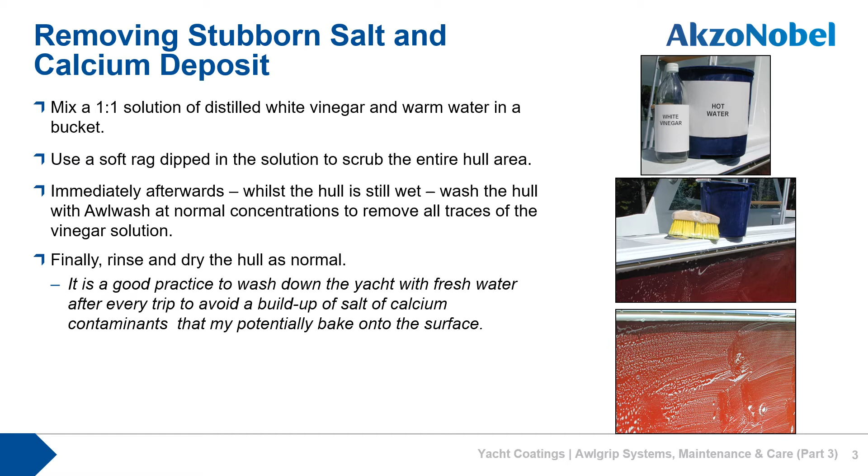Finally, using a pH neutral washing soap such as Awlwash to clean the surface, thoroughly rinsing again and drying. Best practice is always to try and remove any salt residue or dirty water after use straight away with a rinse down. Once you've washed away any contamination or dirt, we always recommend drying the surface.

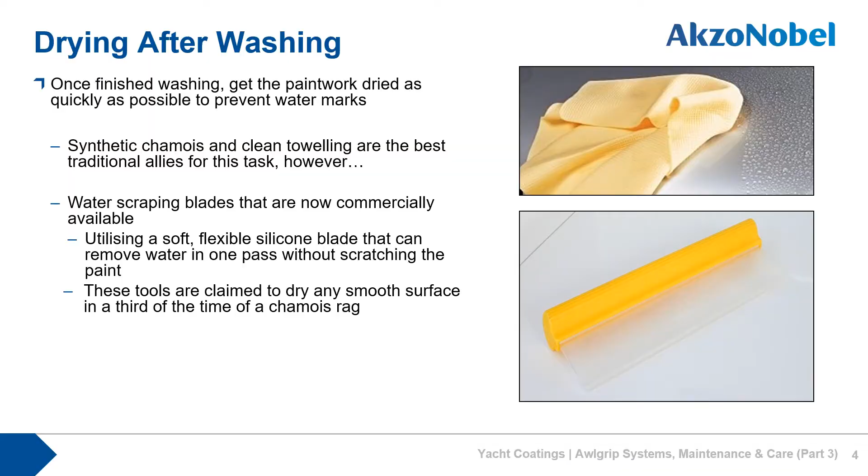As we previously mentioned in session 2 on the water spotting section, the water is actually the carrier of the contaminants that can then etch or bleach the surface of your paint. So removing the water will remove the carrier, in turn improving the finish and reducing the risk of any marking. In this section, we talk about polishing and the aftercare maintenance of your top coats.

Okay, so let's talk about polishing polyurethane top coats. Polishing or buffing or cutting, there are many different terminologies within our industry and what this actually means. For the purpose of this slide, we're talking about using abrasive pads or cleaning compounds with aggregates in them that are used with a mop to bring back the luster or gloss of a top coat. This could either be due to age or even when you do a repair.

So let's talk about Awlgrip top coats. Remember, Awlgrip is a brand name, so we need to consider there are different product names within that brand. So when we say it has Awlgrip on there, what does it actually have? Does it have the polyester polyurethane, the Awlgrip G-line top coat, or does it have the acrylic polyurethane, the Awlcraft product, or does it have HDT, which has a unique combination of both the benefits of a polyester and an acrylic? So you've heard me talk about a polyester and an acrylic.

What does that mean? Well, with our polyester polyurethane, our G-line product, this offers a very resistant and hard surface. And in the curing process, you have a resinous rich layer that forms on top of the pigment. And this is depicted by the diagrams on the right hand side of the page. So let's look what happens if we damage this. Well, this means we expose the pigment, which is depicted by the red dots.

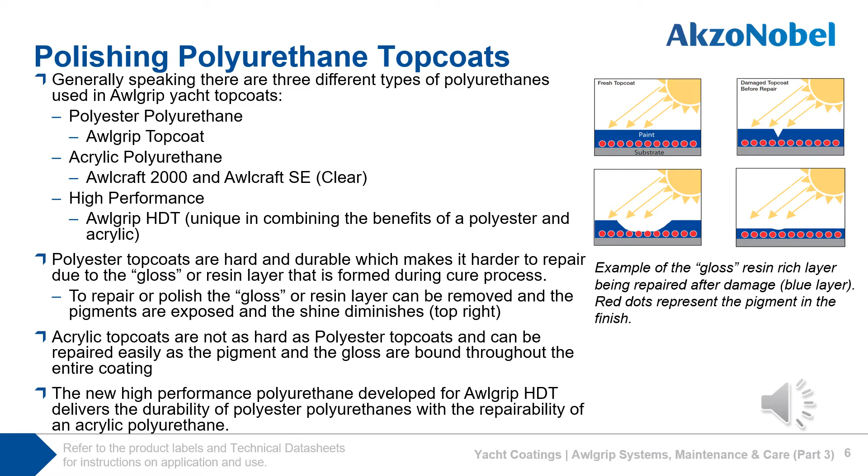Before we polish or buff the surface, we need to consider the type of paint that we're dealing with. As previously mentioned, with a polyurethane, it's possible to damage the resin-rich layer on top of the pigments, exposing the pigment in the long term and causing downgloss. With this consideration, we need to understand the types of materials or compounds we're using. Are they too abrasive? Are the pads too abrasive? Are we using clean and well cared for materials and equipment?

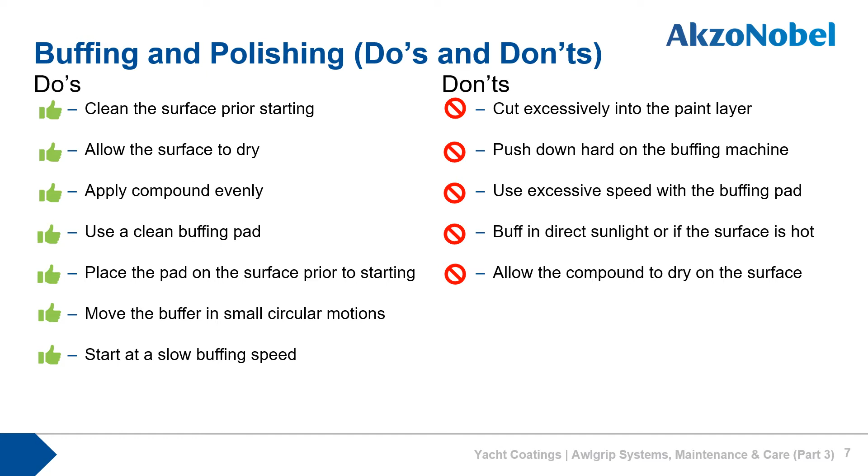We need to consider our buffing speed and the time of day that we're carrying out our polishing and maintenance. As we mentioned in the previous sessions, the paint can soften in high temperatures, therefore making it easier for you to damage in your cleaning regime using your buffers, which may leave swirl marks or polish marks as you go. So let's get further into top coat care and maintenance and some do's and don'ts.

So let's talk about what we can do. We can wash the surface regularly with a pH neutral product such as Awlwash, using non-abrasive pads. We can always rinse the surface down to remove any unwanted or potentially harmful materials. And we can use Awlcare, a polymer polish, to help remove any mild diesel soot stains, and this will help maintain the gloss of your top coat while giving a temporary seal or barrier to the paint surface.

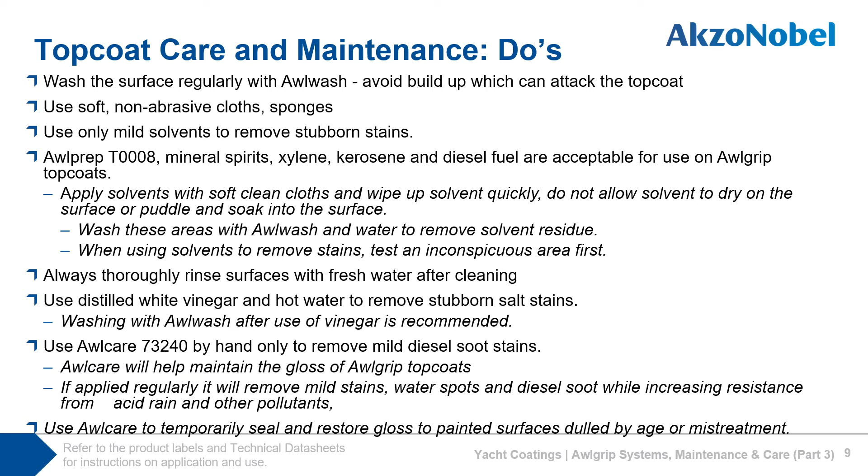On the previous page we mentioned Awlcare, our polymer polish to give a protective layer on your top coat. It's worth mentioning that using traditional waxes could result in a residue that may appear yellow on the surface and attract dirt, as the waxes can break down over a period of time. We also recommend against the use of any abrasive pads or polishing compounds on your high gloss top coats, as again this could damage the resin-rich layer, exposing the pigment on your polyurethane paints. This is when you need to consider, as previously mentioned, if you have a product such as Awlcraft or HDT, that these can be polished and compounds used.

We also mentioned in the second session teak cleaners, and we need to limit the contact of teak cleaners and metal cleaners with our top coats. And if we're unable to shield or protect the top coat, we need to make sure that we wash down thoroughly with a pH neutral water to take away any contaminants or potential of etching.

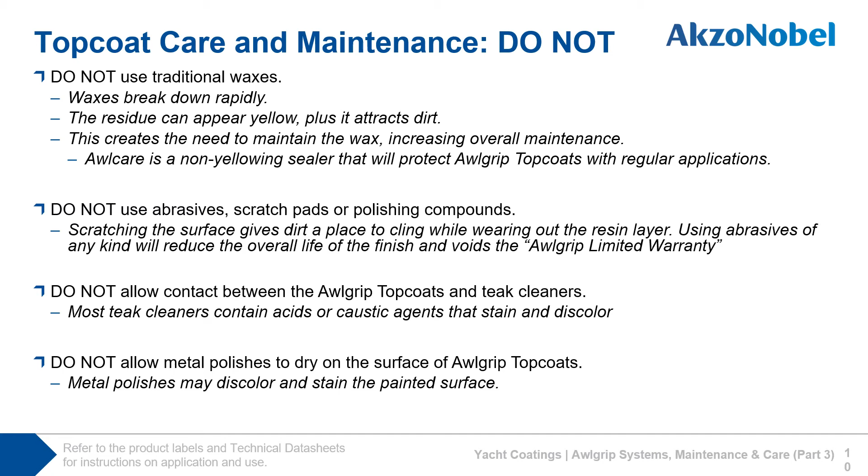We continue on the don'ts, I'm afraid, as there are many things that can affect your top coat and its longevity. So we recommend against the use of solvents straight on your high gloss top coats, such as acetones. And please don't allow wet equipment such as seat cushions or sailbags to sit on the surface of your paintwork for prolonged periods of time, as this can result in osmotic blistering to your coating. We actually see this quite a lot on sunbed cushions where they're left holding moisture, and once lifted after a season, you have lots and lots of blisters in your top coat finish.

And while we're talking about covering your top coat, I really want to recommend against shrink wrapping your top coat with any plastic materials for long periods of time, as these can sweat and hold moisture, particularly just after the paint process, as the paint has to go through its 14-day cure cycle. So etching can even start at this point if we allow it to get wet or for contaminants to sit on the surface.

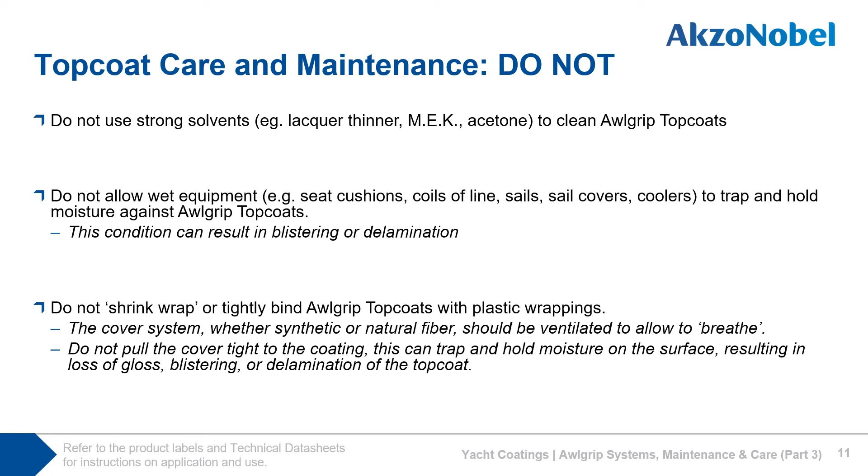So while we're talking about top coat finishes, let's look at some of our wood finishes and our bright work, single pack varnishes, for example. These generally are not buffable, but they are easily overcoatable. So traditional single pack varnishes may be recoated every season. We see this quite a lot by the crew and general maintenance.

Please never use compound products to attempt to restore the gloss and shine on a single pack varnish, as this will only damage the surface. And the use of Awlwash and Awlcare on single pack varnishes is safe and recommended to do.

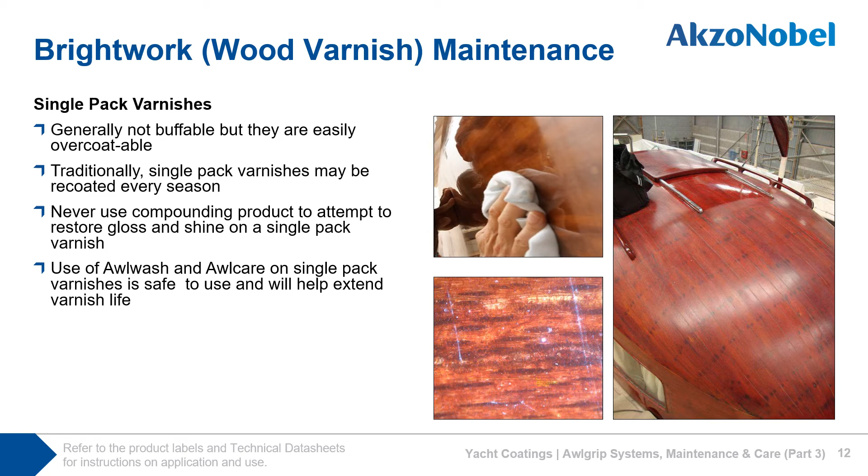So when can we polish the varnishes? Well, we have some 2-pack varnishes in the range that are actually designed to be buffable and polishable. Clear polyester urethanes, such as Perfection Plus, should not be buffed or polished. Again, this is a urethane, and we explained about this earlier. The clear acrylic urethanes, such as Awlbrite, you can polish, and these are similar characteristics to our Awlcraft 2000.

As we previously mentioned, it's always important to know which coating you have, so you know how to clean, or even when you attempt to bring back the luster, whether this is going to be possible or not.

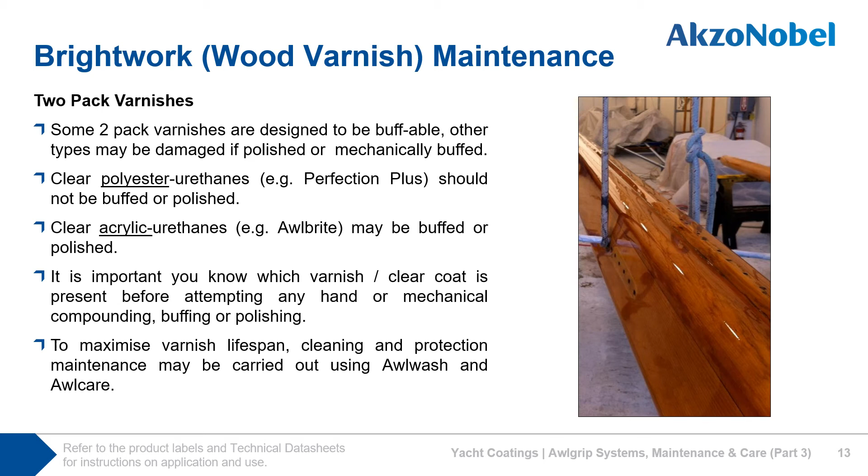In the world of super yachts, there's definitely a trend for special effects such as pearls, metallics, or even satin or matte finishes. We'd like in this section to talk about matte finishes and how to care for them. Semi-gloss or matte finishes. It's all about managing expectations. It is possible to maintain and keep these surfaces in their beautiful finish. However, there are always considerations to make, such as fender rub.

Any rubbing or prolonged buffing of the surface can give a polished area. This means we are limited in how we can maintain and care for a matte finish, because any polishing will result in a different appearance due to the gloss levels being increased.

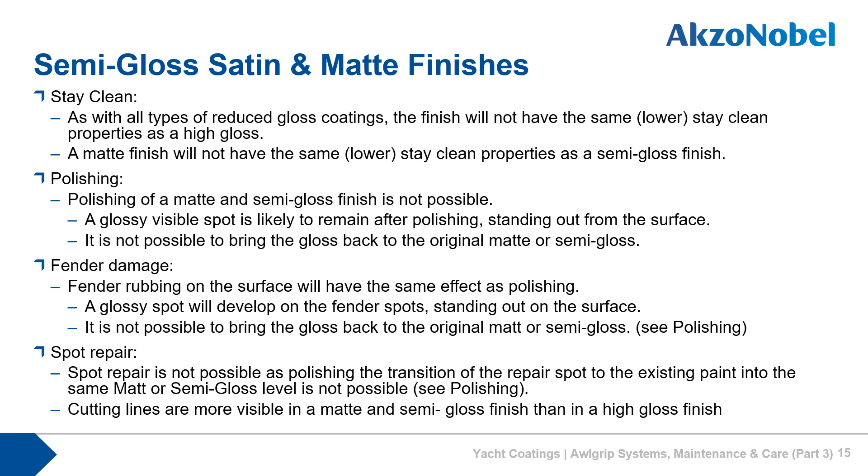So let's try and help a little bit, because there's a few myths with satin and matte finishes, and one of the big things in this is their visual appearance. And if you ever go through a paint shoot where you're having any matte or satin finishes, it's worth recommending that your visual sign-off is the only way, as sometimes with a matte finish it's difficult to see the difference between 10 or 15 gloss units. So a gloss unit isn't really the best way to measure your finish. If it looks right, it is right.

We should also take extra care when cleaning a matte or semi-gloss finish, because the incorrect cleaning or polishing of the surface can create a glossy spot. And we'll touch on this a little bit further as we go through the presentation.

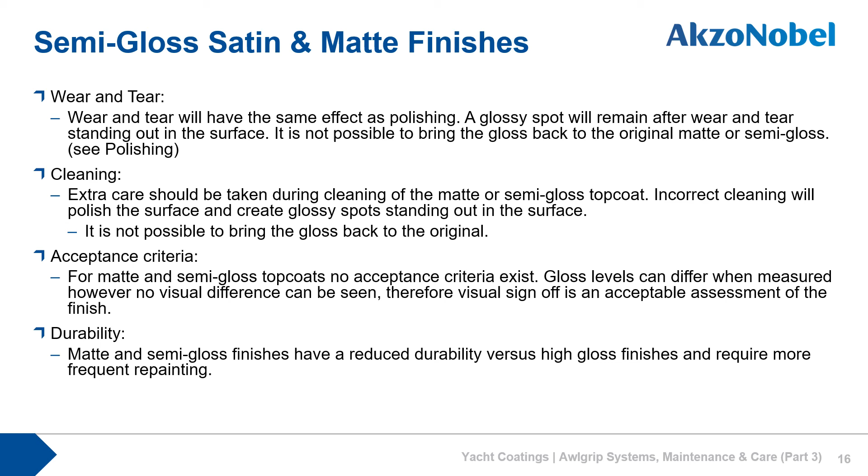So how do we clean our matte finish? We'd recommend thoroughly rinsing the vessel with cold water to remove any dirt or dust, then using a pH neutral soap, or wash in this case, and a soft sponge to minimize the risk of any abrasion. Clean the surface. Then you would need to rinse thoroughly with cold water that's pH neutral and allow the vessel to air dry.

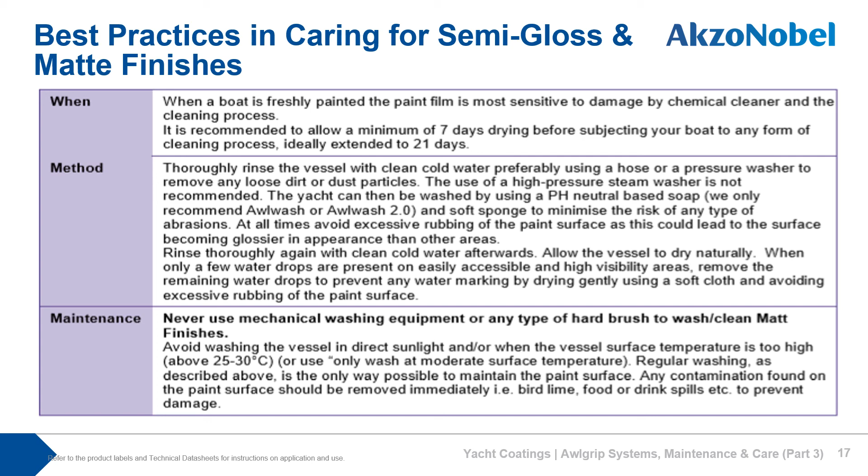Any water spotting can be removed by a soft cloth using a gentle motion to remove the imperfection. Always avoid washing the vessel in direct sunlight, as we previously mentioned with our gloss top coats. Okay, so let's finish with our matte finish. We should always take care not to allow any type of solution to dry on the paint surface, as this could damage the surface even further.

And I think we're all aware that it's not possible to repair a matte finish. You would have to paint to a taped edge or reshoot that particular section. So consideration always needs to be taken when choosing the right top coats.

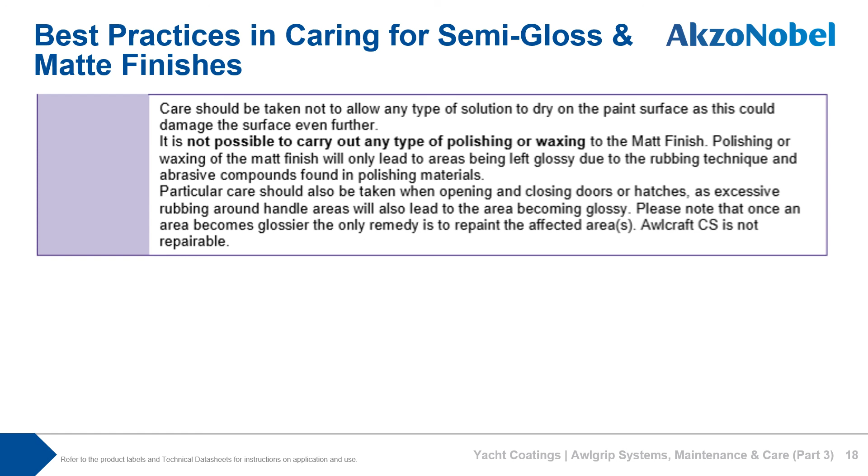I hope you found these 3 short presentations interesting, and they've gone somewhere towards helping you maintain your top coat finish on your vessels.